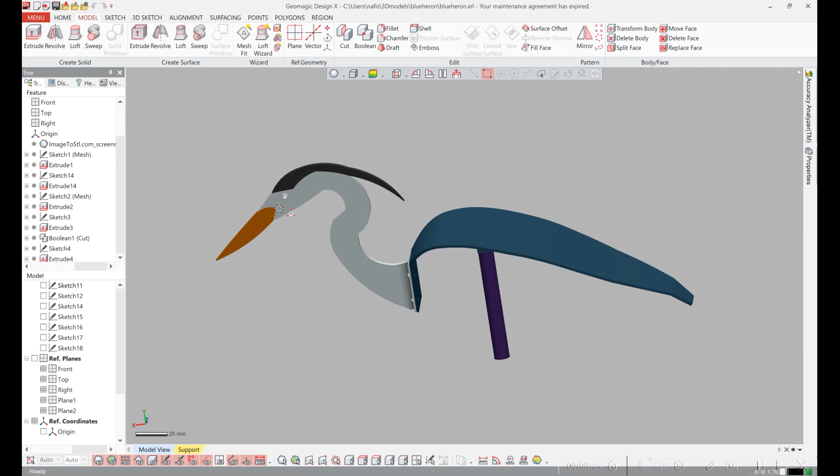I've designed the blue heron in several pieces. The front piece is made up of 3 different colors, and then it uses 2 bolts to attach to the back piece. The back wing body is made out of 1 piece, and then there's a rod holder that allows it to spin and swivel.

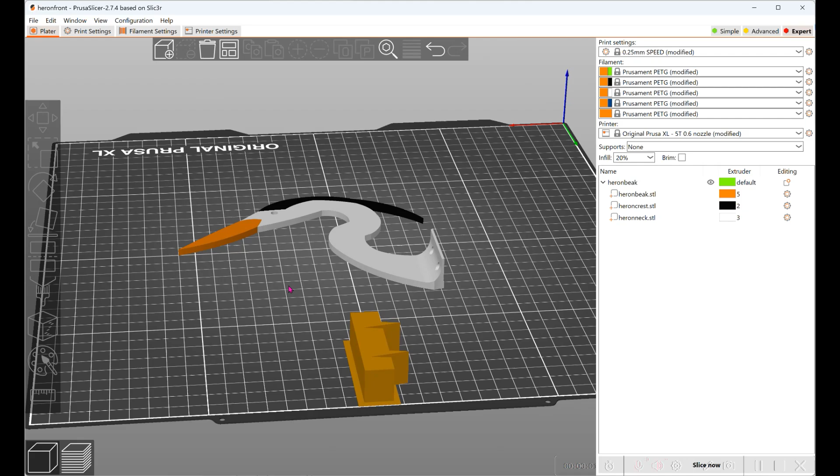So if you load it into the Prusa slicer, it comes in as a 3-color part. The XL can actually print 5 colors at a time. I've got it set up here, and I don't use support.

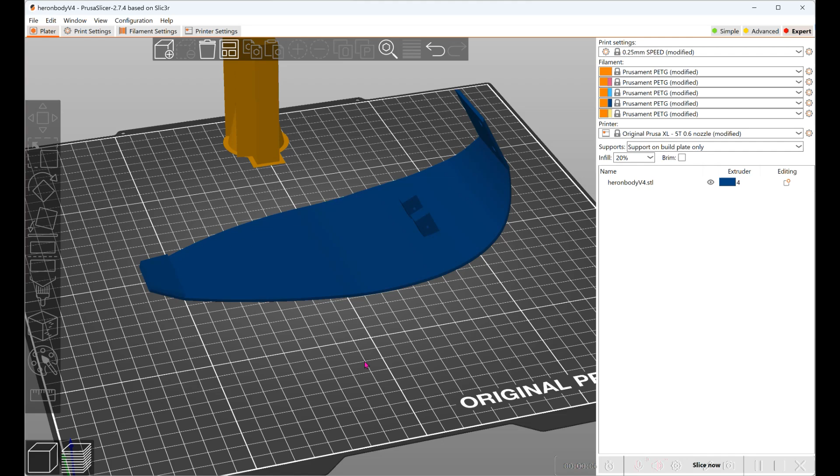The back body wing I have is oriented in this direction, and I use support only on the platform, under the tail, the back, and under the front. You don't need it for the holes up there, and if you do put support, it makes these really weird things that fail.

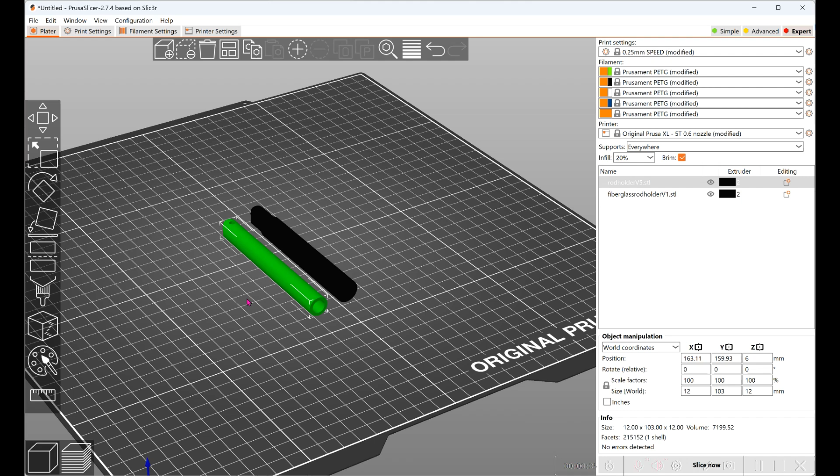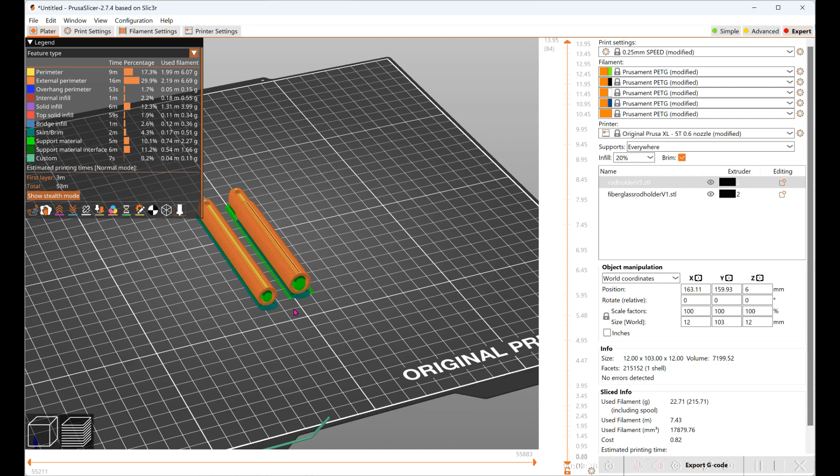I've designed 2 different kinds of support rod holders. One is for the 6mm carbon fiber rod, and the other is for the fiberglass poles you get for your driveway at Home Depot or Lowe's. You can use support or not, but support's really hard to get out. The important part is to put a brim on it, otherwise it tends to fail.

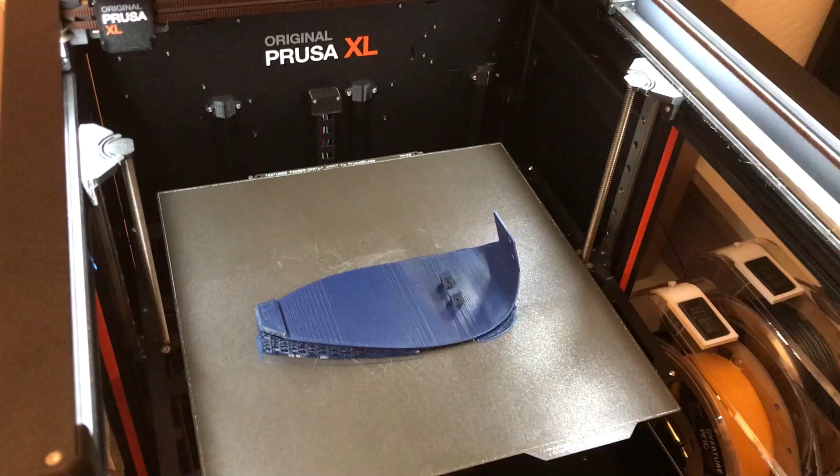Assembling the model is pretty straightforward. You've got the head piece that has 2 screw holes that bolt into the body piece.

Then you have the rod holder that connects to the body. The only thing you need is some 8/32 screws - I'm using nylon screws - and then a little 1 1/4 3D nail that acts as the hinge. I use a little super glue to put a dab of cement on the nail so it doesn't back out.

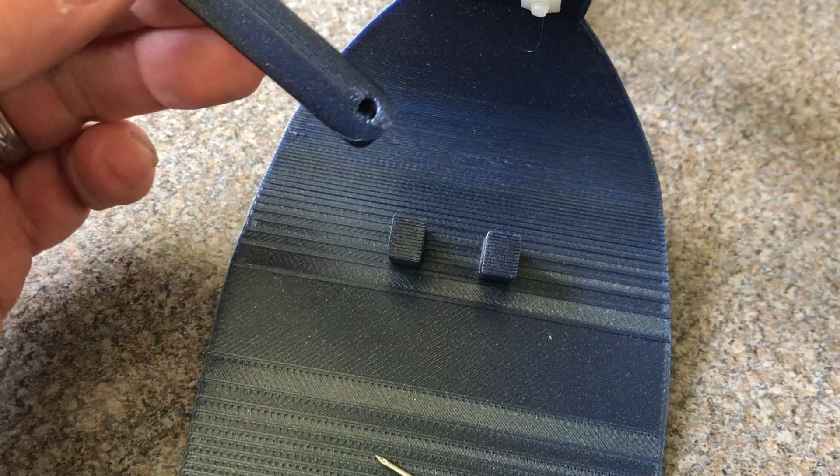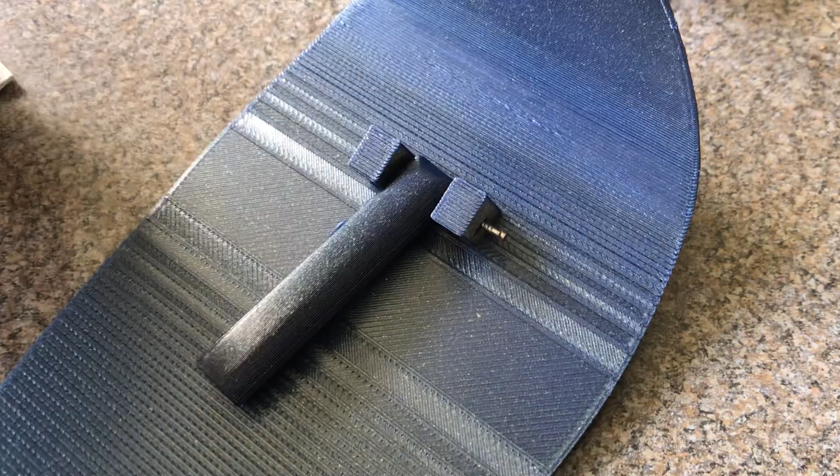Next, the rod holder goes between these 2 posts, and it uses a nail as a hinge - a 3D 1 1/4. Once I get it started, I put a dab of super glue over here and then push it in so that the pin doesn't work its way out.

Turns out the weight and balance is tricky because it depends on what filament you use, what coarseness you print it in, and what infill you use.

On the back of here I've made a pad, and I have extra spacers that I've printed. Here are some tail weights that you can just glue on with super glue, and that will make it so that when it's sitting upright you want the bird to be almost level, like that. See, right now it's not, so we have to add weight to the back here to get it to straighten out.

In this case I've used the fiberglass driveway marker pole with that particular rod holder, and it's pretty windy out, so you can see the wind pushes the toy all the way up and then it will go down. And this is an example of the 6mm carbon fiber pole.